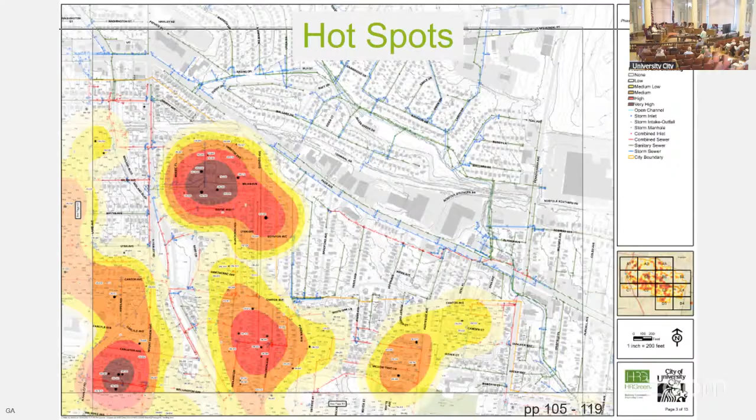The report goes on to discuss the mitigation. How do we fix it? What are the fixes? You can reduce the stormwater, decrease the impervious area, add detention basins, rain gardens, dry wells, amended soil, and a close cousin, adding pervious area. Forest, turf, that kind of thing. You can divert the stormwater away from your structures, diverting the overland flow to the storm sewers. That's the way most urban areas do it.

You can discharge the stormwater into channels. In rural areas, they discharge it to the roadside ditches. In dense urban areas, like the inner ring suburbs and the city of St. Louis, it goes into storm sewers. In our area, most of the sewers are combined sewers. That is, they have sanitary wastewater as well as stormwater in the same sewer. Only the extreme southwest corner of the city is a separate system.

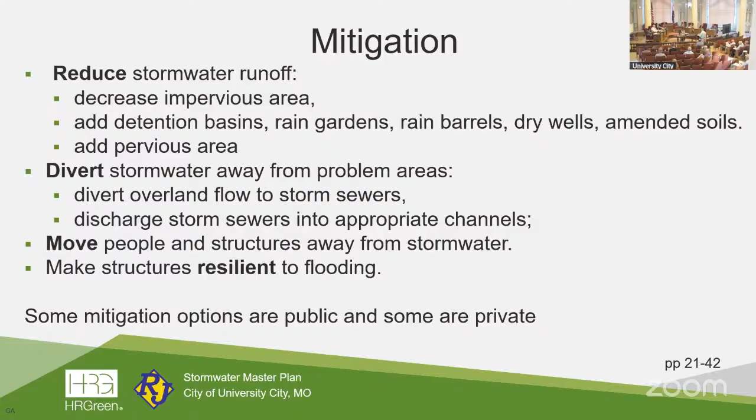You can move people away from flooding. Your buyouts on Wilson Avenue, that's moving people away. And you can make the structures that are in floodwater more resilient. We'll talk about those in more detail. By the way, all of this mitigation costs money. Some of it is private and some of it should be public. We'll talk about that a little bit later.

By the way, the page numbers in the lower right-hand corner of these slides are page numbers in the report. So if you want to go back and correlate this presentation to the written document, this is a way to do it.

Let's talk about some of the mitigation now of the problems. We picked out some examples so we could get some costs. These aren't necessarily the worst problems, but they're examples of all of the problems in the city. One case is on Westmoreland, just south of Forest Park Parkway and a block west of Big Bend. A house there has a lot of water running off of Forest Park Parkway and through yards. So it's not just from the expressway, but it's also from neighboring yards. And he has ponding in his backyard.

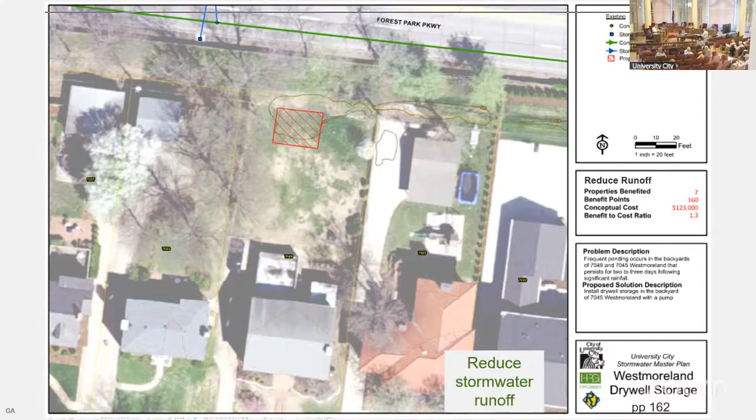Another common problem is on the next slide. On Milan Avenue, there's drainage through yards. Again, a solution here is an inlet. There's already a sewer close by. The cost for adding this inlet, some regrading in the yard, improving the inlet is $134,000. And the benefit cost for this one property is 3.1. So if you were comparing those two, you would choose this project before you would choose the other one, if you wanted to use the benefit points to set a priority.

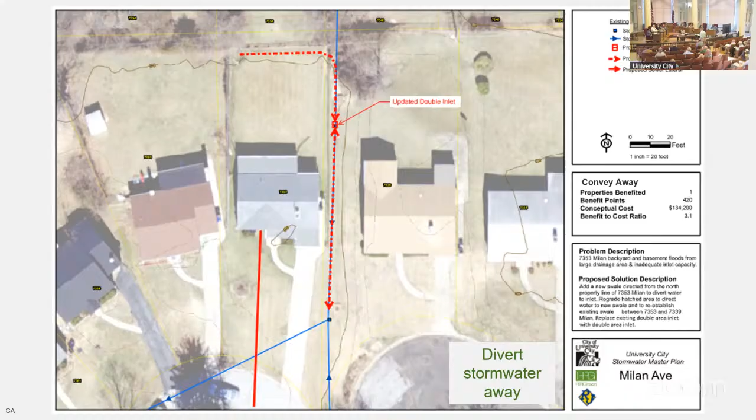Let's talk about diverting water. 7,000 block and 7,100 block of Amherst. That's Amherst, which is 3 blocks south of Vernon and between Midland and Pennsylvania. Water flows down the gutter, jumps the curb in a severe storm, not every storm, and flows down into the basement garages, causing damage. Not every house has that problem on that double block.

You could put in additional inlets. With detailed study, you may have to enlarge the pipe to get water in the gutter into the pipe before it fills up the gutter at the curb and overflows into basements. If you did that, it's $1.3 million to do that. And the benefit cost for that is 1.4. There's a couple other ways to address that problem.

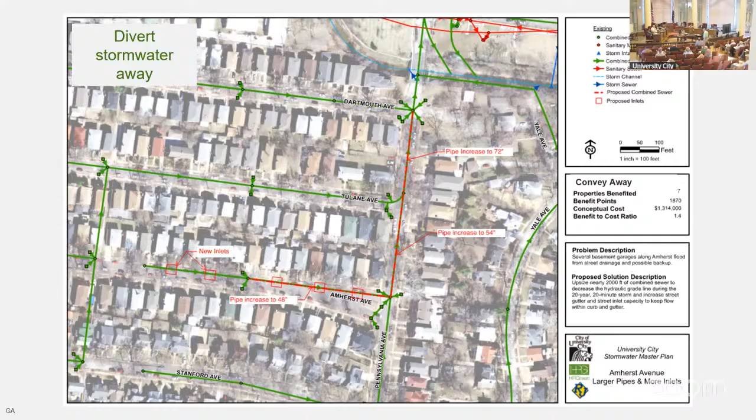One of those, Councilman Smotherson, the lower left-hand corner, I want to call that to your attention because I was at a meeting where you talked about the damage to your basement. Thank you. Lower left-hand corner of this. You can close off your floor drains in your garage, and you can suspend your plumbing from the joist to the first floor and pump it out to the sewer. That separates your sewer from the sewer that may be surcharging.

You have a basement backup. These 7 houses that have the basement garages may benefit from that. So if the sewer surcharges, it doesn't come into your basement. Also, you could add barriers at your garage door, your basement garage, and close off the water that overflows the curb. There are automatic systems for that. They're very expensive. The one shown in the lower right-hand corner of this diagram is a manually placed system.

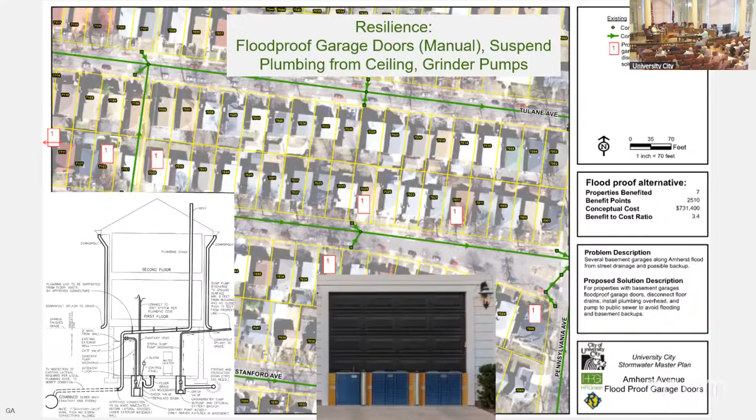Eric is going to talk about some of our other projects now. Yeah, so we're going to stay with a few example projects and then we'll step back and look at some big picture conversations. So what we're looking at here is Groby Road, where it crosses over the River des Peres.

Former councilperson Cusick had a home in this area that was flooded. So that's kind of putting in perspective for folks that know where Tim used to live. This is a project here that flooded again in 2022. The bridge itself has a narrow opening, and our task force identified that very early on in the project.

So one of the strategies that the task force asked that we look at was replacing the bridge. The bridge was built in 2006, so it's a fairly new bridge. It's very functional. So replacing it would be sort of throwing out what seems to be in some ways a perfectly good bridge. The constriction that's happening at that bridge is really due to the channel that's upstream and downstream of the bridge. So while the bridge itself is somewhat of a constriction, removing just the constriction that happens at the bridge doesn't solve the flooding problem in that neighborhood.

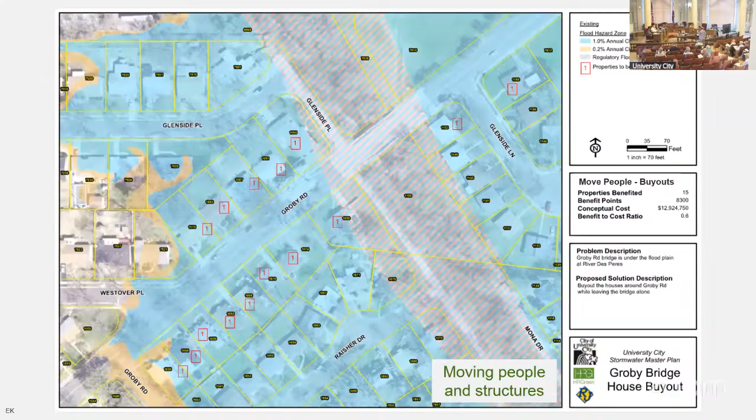And I'm going to step back here on the next slide and look at the bigger picture, because obviously everybody in U City is concerned about flooding of residents as a whole. So this picture here tells you kind of one small area of flooding, but we have a larger issue that's citywide. And what we've heard from MSD in this council chamber and other meetings is that we can't engineer our way out of flooding. And they have said that buyouts of homes are going to remain a very cost-effective and necessary tool to mitigate the flooding. And the master plan team agrees.

What we did is we looked back to past reports. The Corps of Engineers did a study that they published in 2013 that said, in U City, we think you ought to buy out all of the homes that are in the 5-year floodplain. Okay, so that ended up being about 100 homes. But what is a 5-year floodplain? Well, people have heard of the 100-year flood. That's something that had become a sort of a common piece of vernacular.

What that really means is that there's a 1% chance that the flood is going to reach that elevation in any given year. And so a 5-year flood says there's a 20% chance in any given year that you're going to get that flood. So a 5-year flood is a very frequent thing relative to a 100-year flood. So when the Corps of Engineers said, buy out all the homes that are in the 5-year floodplain, what they're trying to say really is, let's buy out all the homes that are most frequently flooded. Understanding that there are others outside of that boundary that are still going to flood, but let's get the ones that are flooding most often.

So that seemed to be a pretty good project at the time. The Corps of Engineers gave it a 2.1 cost to benefit ratio. So that's a very good project to do. Since then the Corps of Engineers has sort of flipped the script on that and they no longer recommend that, but that's a whole other story. But it remains true that looking at homes that frequently flood is a really good idea. And so this project that you're looking at here says what that should be.

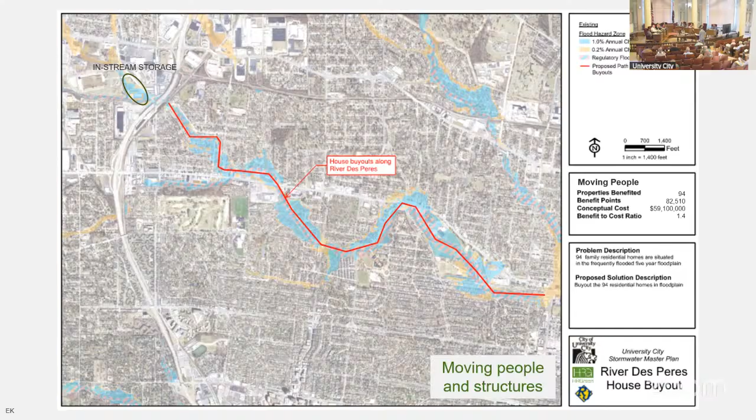Okay. I'll go on to a different example here. This is sort of back over to Groby Road. This is Mona Drive, just downstream of Groby Road and just upstream of Firehouse number 2. There's been an erosion project going on here for years and years. The city and MSD are aware of this. MSD's done a bunch of dumping rock. The rock then washes away and it hasn't really solved the problem.

So the problem here is that Mona, particularly the north end of Mona, is a dead end. So it's the only way that people can access their homes for a certain amount of homes there at the end of Mona. So if that erosion continues, it washes out Mona Drive and now people can't get to their home. So it's an important project to consider because we've seen past solutions fail there. What we know based on the engineering we've done is that you need more of a vertical treatment. And when I say vertical treatment, that's essentially a wall and those walls become quite expensive.

So what you have here is a project that's going to benefit 17 homes at a cost of over $4 million. Benefit to cost ratio at 0.5. So it's trending down towards not a great ratio. In fact, what we think here is that buyouts start to become a more attractive solution in this particular site. So that's just a way you can look at things. And Gary's presented that as well. You have a problem and there's a couple different ways to solve it. And in this case, we do think a buyout is probably your better option.

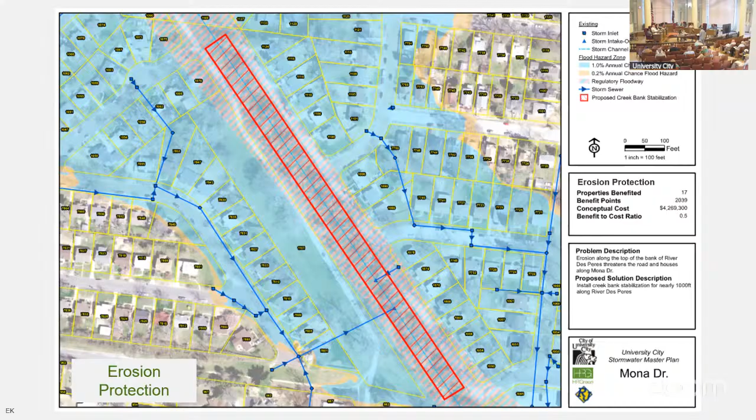Another example, this is over on north and south at Amherst. It's a bank erosion problem. A couple of the properties are suffering from fence issues and things that are, while important, not life critical. There is one home that's on the corner of this site. It's 7591 Amherst that the bank erosion is starting to steer in and is trying to take the house. Since we did this analysis, which showed you have a $1.3 million cost, it's going to benefit two properties at

a ratio of 0.8. But since we've done this, in your own council chambers, the subject's been raised that MSD's on the hunt to do a different kind of project here that has to do with the sanitary sewer system. And they've actually made, I suppose, an offer towards buying out one of these properties. So that may change the math on this because that property is the one that's most at risk. And if MSD buys that and tears it down, well, then the math on this particular project changes. But it does give you a sense that these bank erosion projects are very expensive to fix.

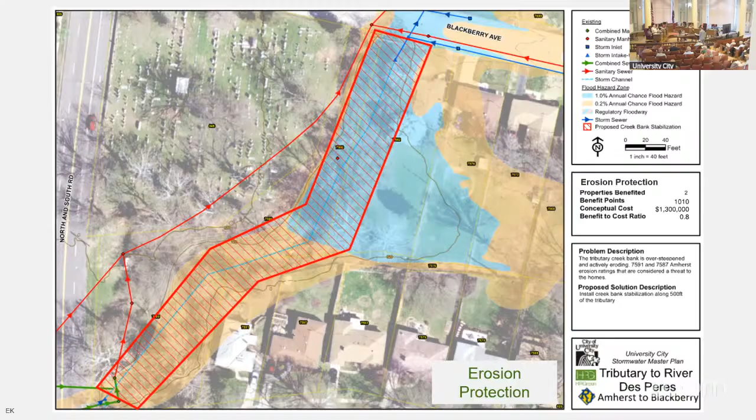Okay. I'm going to turn it back here to Gary for one more example project, and then we'll get back into some big picture stuff.

On Mendel, near Canton, near the United Hebrew Cemetery, downhill from that, there are 3 intersections that flood frequently. That intersection flooding is independent of what goes on the cemetery property. I should say the lower 12.2 acres here in the drawing is greatly influenced by the cemetery. But the other 23.6 and 24.8 are independent of the cemetery. They're different watersheds. We have 3 intersections that flood there.

There are ways to minimize that flooding. I'm not sure that we can eliminate the flooding there, but make it much less frequent. One of the ways is to take the sewers that are on the hill west of Mendel, east of Mendel, and take that water straight through to a tributary to River Des Peres. Make it independent of the intersection.

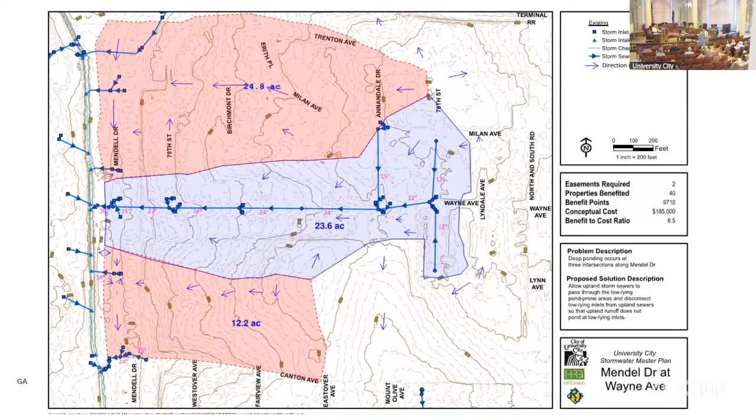Great. So what we're showing here is just a very overly simplified summary to show you what kinds of costs we're talking about from the various different types of stormwater problems, overland flooding being the big one, of course, coming out at almost $52 million at the high end. Street flooding, like Gary was just talking about at Wayne and Mendel, is second on the list, coming out at almost $4 million. Flooding for yards, we're getting to smaller types of projects, so of course the total costs are less. And then these bank erosion projects are shockingly high as well. So this kind of gives you a breakdown.

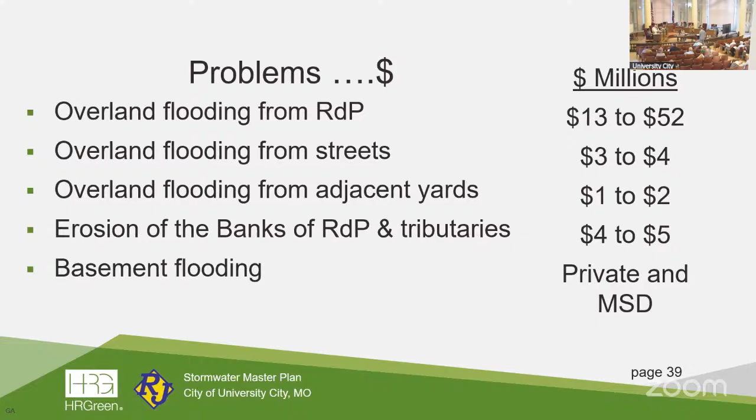The goal of this whole project really is to help get the city some perspective on the types of problems and the total costs that are involved. And so we can start to prioritize as a city: how do we want to go about this? How fast do we want to get this done? And which ones should we do first? So that gives you some perspective on that.

The way we've been ranking these projects is the same way that MSD ranks it. And that's on purpose. There's been some consternation about MSD, of course, throughout the region and in our city as well over the years. But we do think one of the many things they do well actually is this benefit point calculation. And as Gary said, it's a very equitable strategy because it takes away home value and really just says, John's home, my home, they're the same. They're both structurally flooding, and so they're treated equally.

And that's a really good thing, particularly in a community where there's a big spread on home values, right? So we want to take that out of the equation and really just help the most people we can for the dollars that we can. So

the good thing about using MSD's system, well, there's a few, but MSD already maintains a list of projects, just like we're coming up with on our own here for U City. MSD has a region-wide list. They rank those points using this same system, and then they take their own dollars and prioritize, do the highest priority, and just go on down the list. So if we put our projects in that same ranking system, they feed right into MSD's list. And if we're lucky, MSD will do some of those projects for us. So that's a good thing.

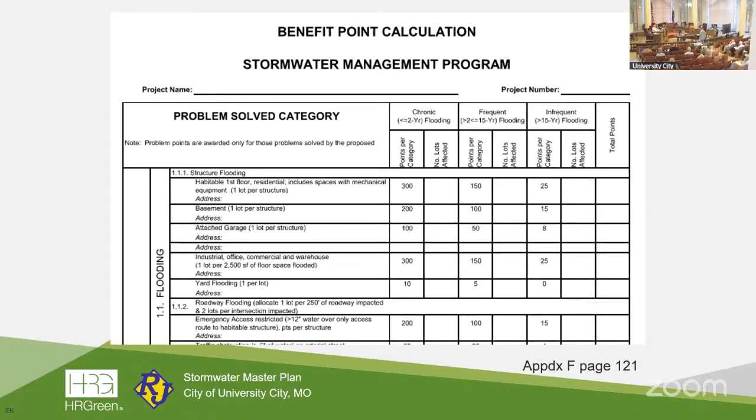Mitigation. So this is something that Gary alluded to from the top, and it has to do with what is a public versus what is a private project. And we know, as we showed in that summary of the projects, there's a huge cost to doing all of this, and it's going to exceed the budget of the city for sure. But for any one property owner who has these problems, it may exceed their budget as well, because these can be very expensive to do. So the need is certainly there.

What we want to do though is to also come up with policy. The city is going to want to come up with policy here that you can apply equally. If anybody comes in and says, I've got this stormwater complaint, I'd like the city to take a look at it, the city can take a look at it. If it's a public problem, it goes in the hopper with the rest of them and gets prioritized, and the city will eventually attempt to solve that problem as budget will allow.

But likewise, if the policy shows this is a private problem, this was a privately built home or a privately built business, it was built in a way that left it vulnerable to flooding, the stormwater problems are local to that property. And so should it really be a public solution? These are hard conversations, but we've seen neighboring communities tackle these same questions, and it just gives your own public works department a guiding document to go to, and they can say, yep, you're a public problem, or no, sorry, you're a private problem.

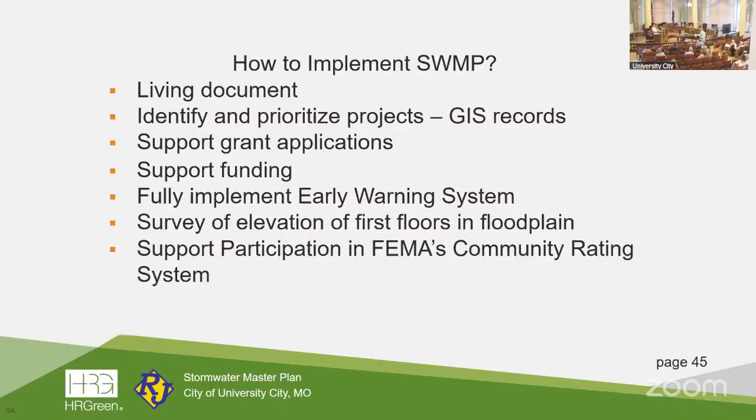Councilmember Teeman. Honorable Mayor, my fellow colleagues, I really don't have any questions, but I just simply want to say, just so we're clear, what we've had here in the half an hour, 45 minutes of presentation is a summary of almost a decade of work. And I want to say to the members of the Stormwater Commission, present and past, that whatever faults this honorable body may have, our gratitude or lack of gratitude is not one of them. I profoundly thank you for the work you've done for this city and for your civic service. So I think I can say on behalf of all my colleagues, thank you.